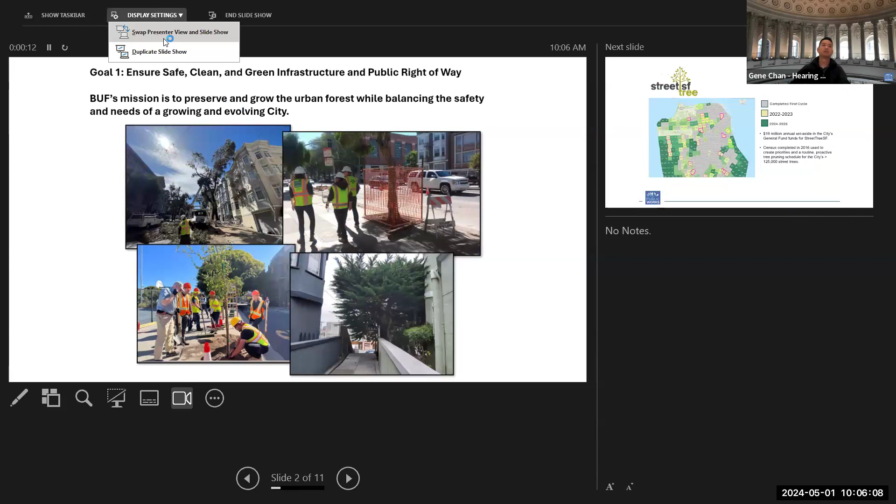Are you seeing the main slide or the presenter view? The main slide. Okay, good. I've had trouble with just the presenter view. Anyway, so this is to hold a hearing for 78 Haight Street.

So we always go through our strategic objectives, and our number one goal is to ensure a safe, clean, and green infrastructure in the public right of way. This means balancing green infrastructure with non-green infrastructure, and balancing the safety and needs of a growing and evolving city. This means very large housing projects, but also trying to replace trees and grow new trees.

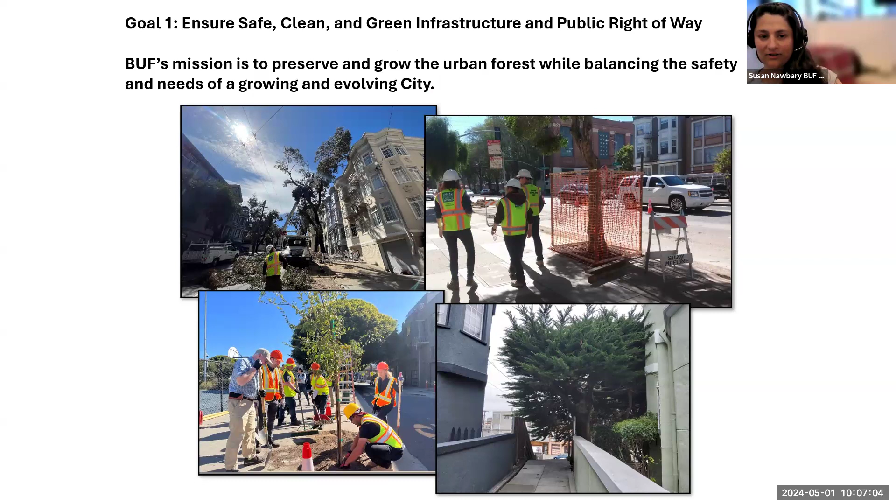But just so everyone's clear, a tree ordinance establishes authorization and standards for addressing a wide range of issues regarding trees, and our urban forestry ordinance is codified under Article 16 of the Public Works Code. That gives us the authority to approve and remove trees, and also for the public to protest, which is why we're here.

A tree removal permit is required to remove street, significant, and landmark trees. We have updates to our code where we have to have a delayed replacement report, replace a tree within 6 months. If we don't do that, we have to put it on the delayed replacement report. It's not relevant here because it's a permit, and that is not applicable to permit applications.

But in this case, also, the owner must pay the difference between the appraised value of the subject tree minus the replacement tree. So the standard in lieu fee for a 24-inch box is $2,431. So if they can't replace, let's say, a 10-inch diameter tree, which appraises for like $5,000, they would be on the hook for the remaining balance.

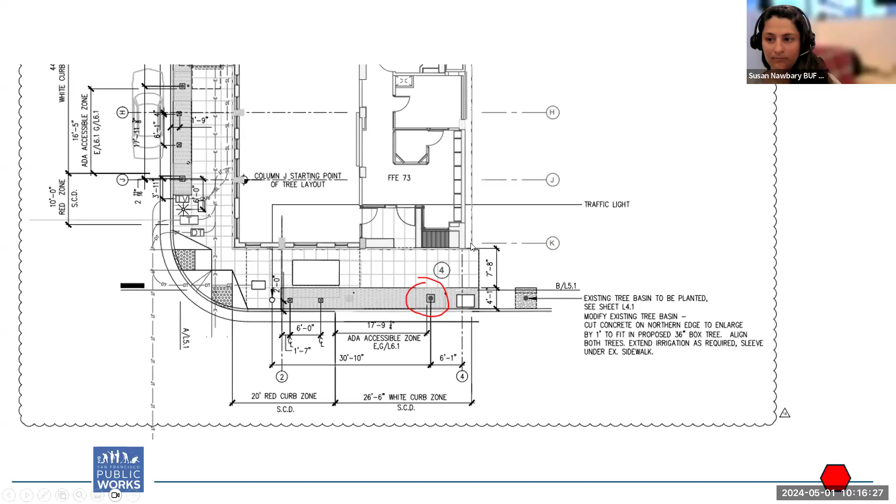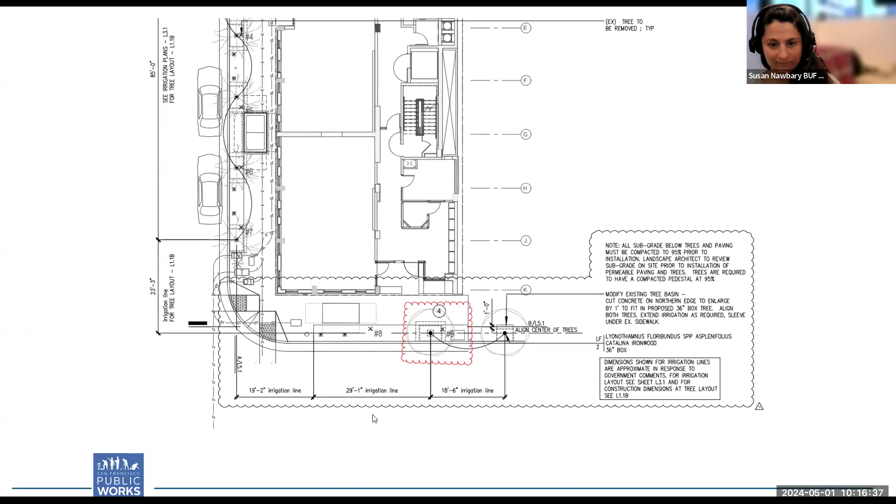Sorry, apparently I misread CL, and it means the center line of dimension. So I'm not sure where the sewer is. I'll let the applicant speak to that.

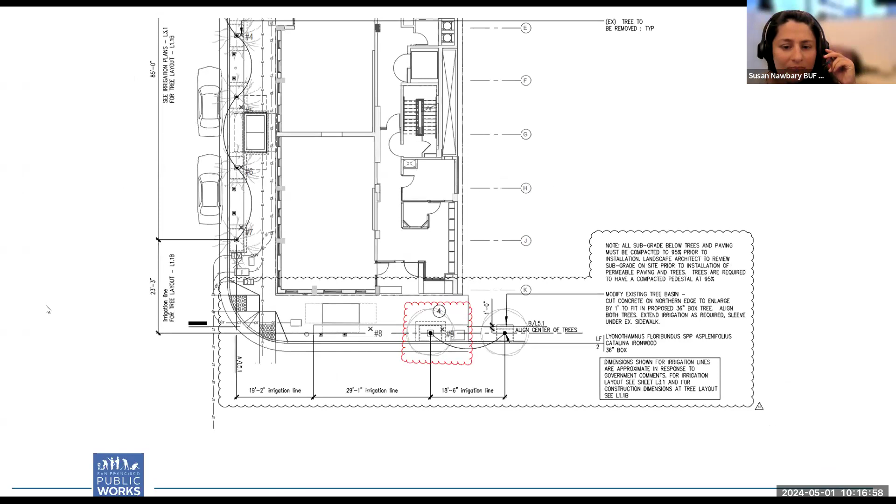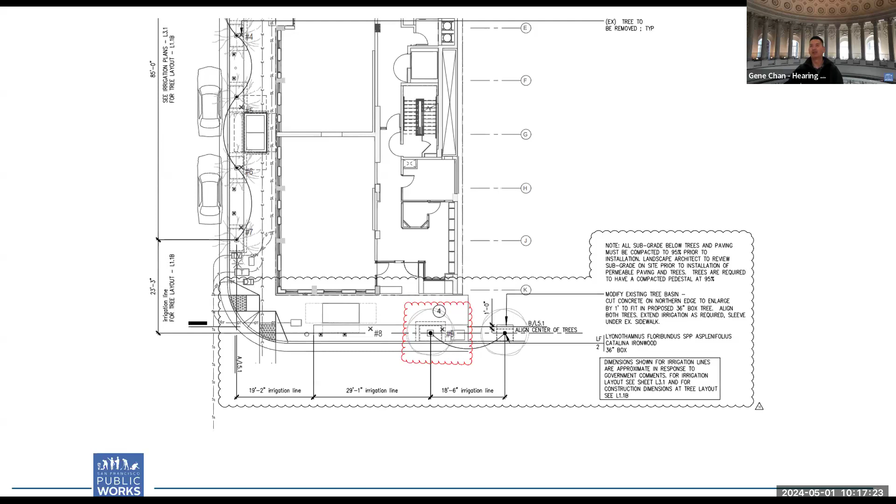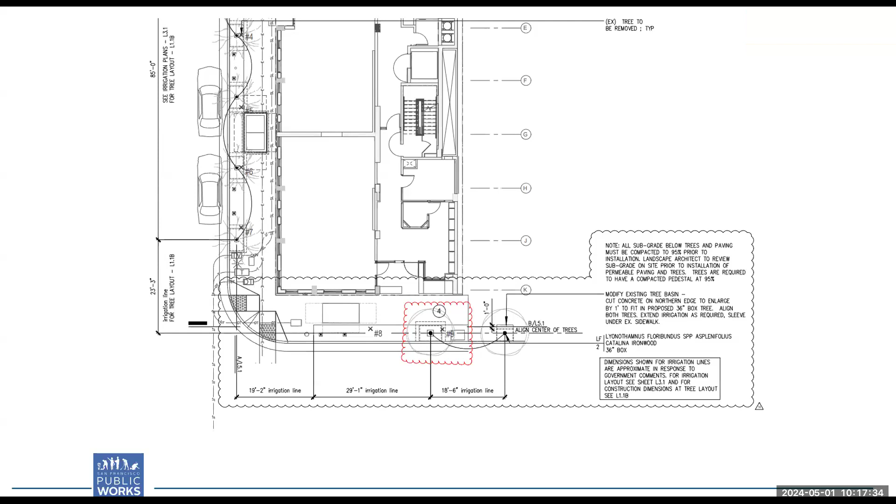Mr. Chan, if you're speaking, you're muted. Can you unmute yourself? Oh, yes. Looks like Rob has his hand raised. Are you calling for the applicant? We didn't hear anything you said. Oh, yeah, I was calling for the applicant, sorry. Okay, so it sounds like it's probably Rob. Yep. Hello, hopefully I can be heard. So I'm the contractor. The sewer and storm is actually off of Rose, on the north end of the project.

If you're familiar with the logistics, if you're looking north on Octavia, then on the south, that corner right there would be the southwest corner. So you have Haight running east and west and Octavia heading north, and then you would meet up with Rose, and that's where you'll find the storm and sewer.

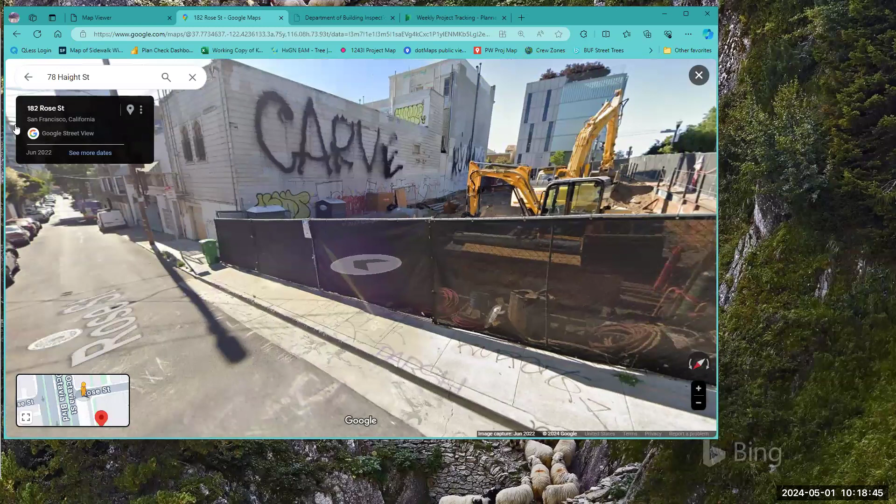Okay, thank you. Is the applicant here today? Okay, Shreya, please go ahead. Hi, yes, I'm with the owner. Excuse me, sorry, I didn't hear that. Oh, yes, I'm the applicant, I work for the owner. Okay.

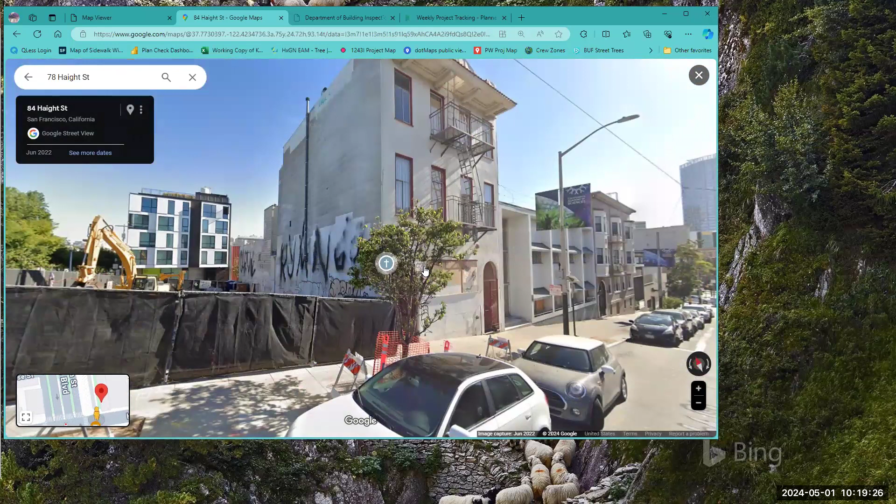You have 3 minutes. I think the main reasoning for us is, like Susan kind of mentioned, we plan to replace the tree, and our goal is to bring back that one tree. The construction utility work is really conflicting with that existing tree on Haight Street, and allowing us to remove it would really save us $40,000 in construction costs. The workaround related to the utilities is really, really expensive, and this is an affordable housing project. It's 100% affordable housing, which will build 63 units for low-income households, including transition age youth. Saving dollars on our budget would be a big advantage to the project, so we really urge you to consider this request.

What utilities are going on that corner or block face? We have electrical coming from Haight, all the way from Gough, which is coming up Haight and then going into our site. That will be kind of the main utilities.

Okay, so that vault is there already, and it's already hooked up, right? Correct. So the main thing is...

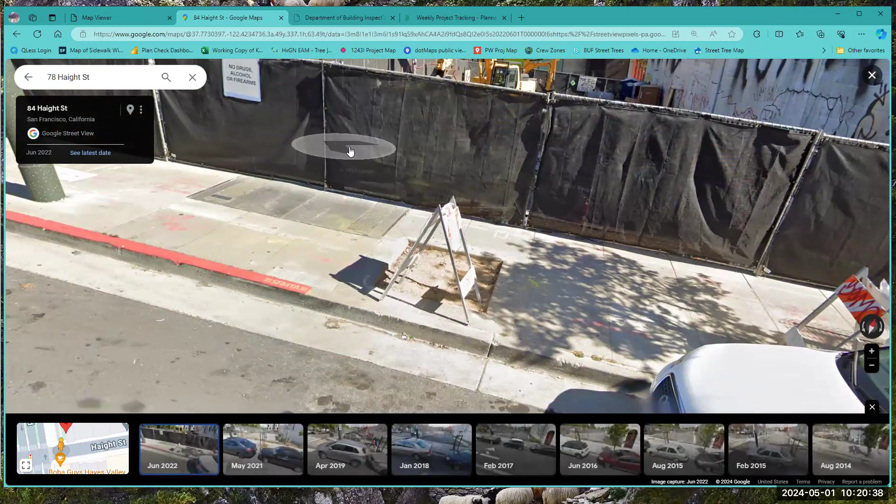There's a need for a lot of trenching in that area. So I think that's number one, that's the first reason. And the second reason is we also need space to build our scaffold so the building can go up. It is a 7.5-story building going up on the site, so it conflicts with the utilities and the scaffolding area. We would have to do a lot of work if we were to protect the tree while doing construction. Sure, what utilities are you trenching for over there?

Rob can probably speak to that a little bit better. He's the contractor, so I'll let him chat about that. Okay Rob, can you please speak to that? What utilities are you trenching for?

So we have our electrical. We've got some temp power coming across in this area, coming across Haight Street, and then up Haight Street we have our temp power. So that whole area is destabilized as well. We're bringing in our joint trench, which has low voltage for cable, telephone, and city fiber.

That area was initially planned for tree removal because of the tight logistics of the site. There's labor involved in moving fence lines so we can move around the tree with dumpsters and other cartage. So on top of the bridging of the scaffold and the protection and maintenance of the tree protection, there's some logistical labor costs.

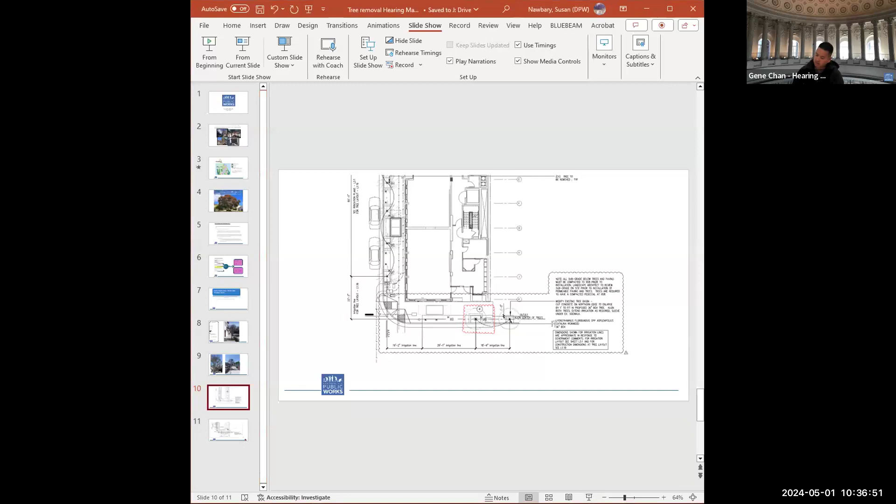Okay, so within the 3 years establishment period, if the tree does not thrive, is there a commitment or funds set aside to replace the tree? We can certainly make that happen. We can certainly set aside a fund for tree replacement if that does not happen.

Generally speaking, we are an owner, manager, and service provider, so we own the building for the long term. So if something was to happen like that, I think TNDC would pay for the tree replacement in the property frontage. Somebody mentioned our 555 Larkin project, which recently finished in the public comment, and I think there were heavy winds and that tree was not doing well. And so that is something the development team and property management would work together on to come back and replant or take the necessary action so that we are fulfilling our commitment to replace the tree. Okay, great, thank you.